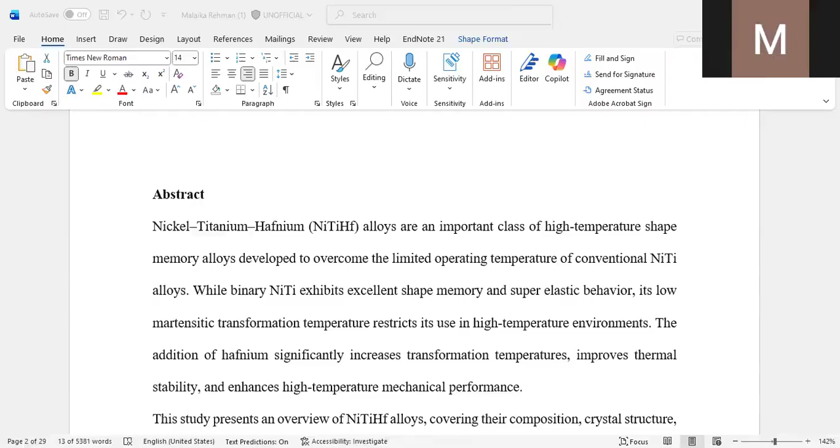Today my topic of presentation is nickel titanium hafnium, which is represented as NiTiHf.

First is its abstract. In its abstract, it tells us that nickel titanium hafnium is a shape memory alloy which works in advanced smart materials, works at high temperature, and is used in aerospace, automotive, medical, and energy systems, and many more.

Its keywords are nickel titanium hafnium alloy, high temperature shape memory alloy, Martensitic transformation, crystal structure, smart materials, and artificial intelligence.

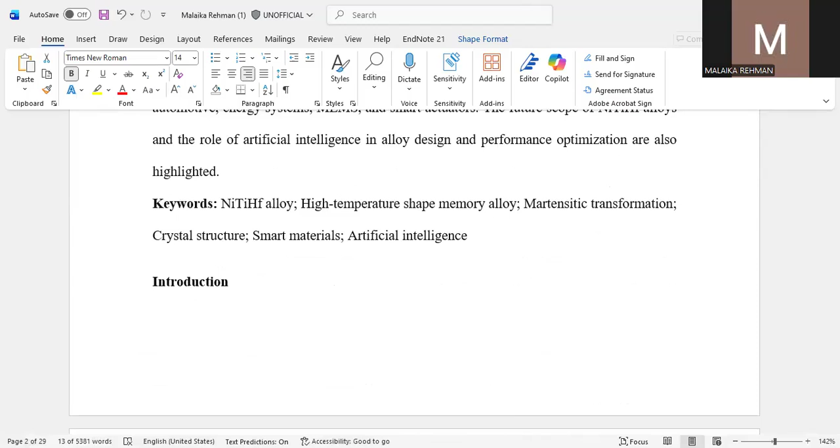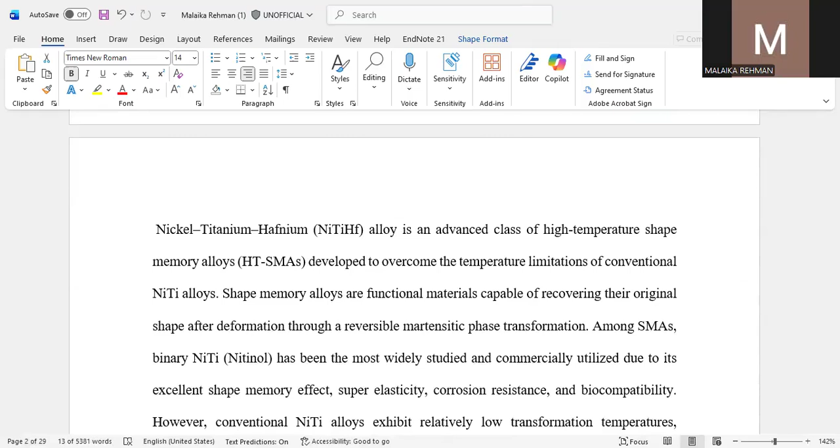In its introduction, it tells us about what is a shape memory alloy. These are materials that can remember their original shape, formed at high temperature, recover shape when heated, and based on phase transformation used in actuators and smart devices.

It tells us that nickel titanium works only when the temperature is below 100 degrees Celsius. Many industries need materials for high temperatures, so nickel titanium was added with hafnium, and a new alloy was made, which is nickel titanium hafnium, NiTiHf, and it can work at temperatures of about 200 to 300 degrees Celsius.

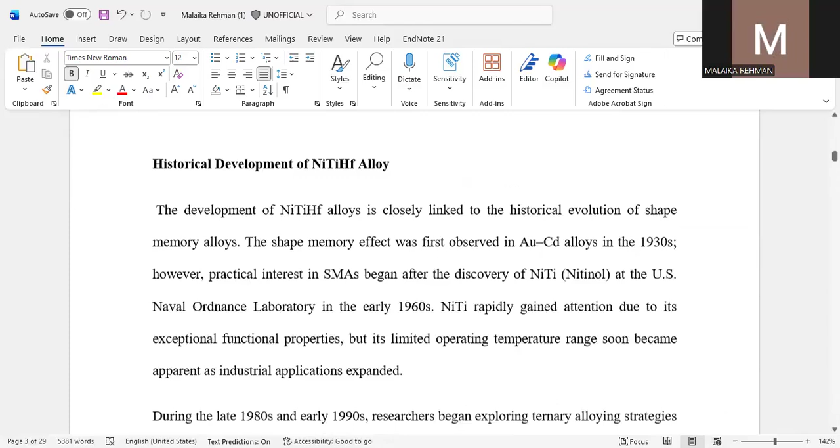Then, history of nickel titanium hafnium alloy. Its development is closely linked to the historical evolution of shape memory alloys. The shape memory effect was first observed in AuCd alloys, gold and cadmium alloys.

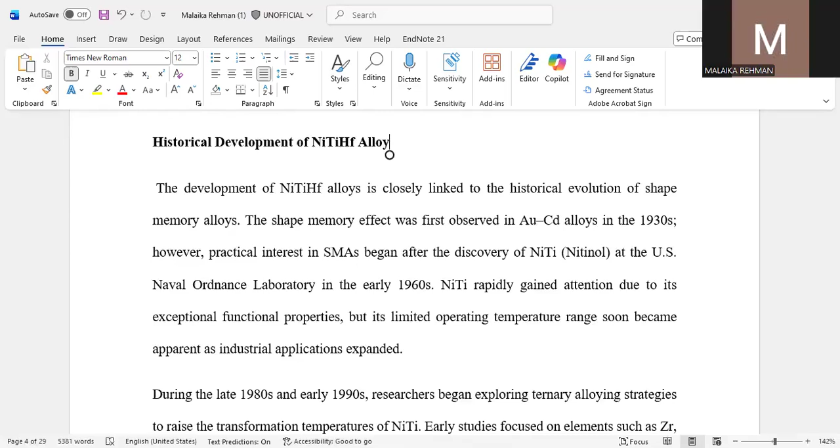In the 1930s, practical interest in SMAs began after the discovery of nickel titanium, Nitinol, at the US Naval Ordnance Laboratory in the 1960s. NiTi rapidly gained attention due to its exceptional functional properties, but its limited operating temperature range soon became apparent as industrial applications expanded.

During the 1980s and early 1990s, researchers began exploring ternary alloying strategies to raise the transformation temperature of nickel titanium, Nitinol. Early studies focused on elements such as Zr, hafnium, palladium, platinum, and gold.

Among these, hafnium emerged as one of the most effective alloying elements due to its strong influence on lattice distortion and phase stability. Initial investigations demonstrated that partial substitution of titanium with hafnium significantly increased the Martensitic transformation temperature without completely suppressing the shape memory effect.

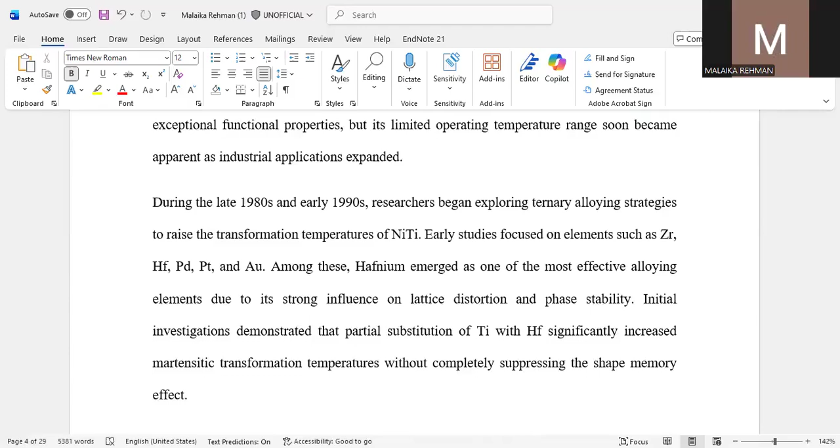Then, in the mid-1990s, systematic experimental studies confirmed that increasing hafnium content, typically about 10 to 30% atomic percentage, could raise the transformation temperature well above 200 degrees Celsius.

This period marked the recognition of nickel titanium hafnium as a distinct class of high temperature shape memory alloys, rather than a simple modification of nickel titanium Nitinol.

Researchers also observed that hafnium addition increased lattice parameters, strengthened atomic bonding, and enhanced resistance to thermal degradation, although it introduced challenges such as increased brittleness and processing difficulties.

From the early 2000s onward, advancements in processing techniques such as vacuum arc melting, powder metallurgy, rapid solidification, and thin film deposition enabled better compositional control and microstructure refinement of nickel titanium hafnium alloys.

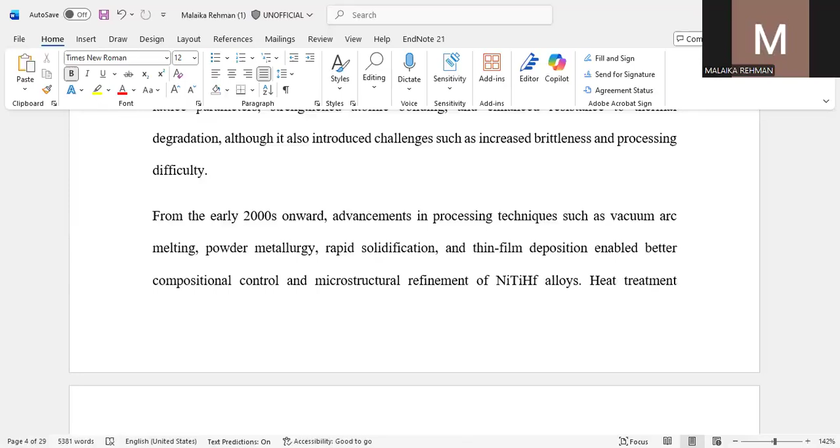Then, heat treatment strategies including solution treatment and aging were developed to optimize precipitate formation and improve functional fatigue life. These developments significantly enhanced the reliability and repeatability of nickel titanium hafnium alloy under cyclic thermal and mechanical loading.

In recent years, research on this alloy has expanded toward thin films, micro electromechanical systems (MEMS), and additive manufacturing, driven by the demand for compact, high temperature actuators and sensors. The alloy has also gained attention for its potential role in aerospace morphing structures, adaptive engine components, and smart energy systems.

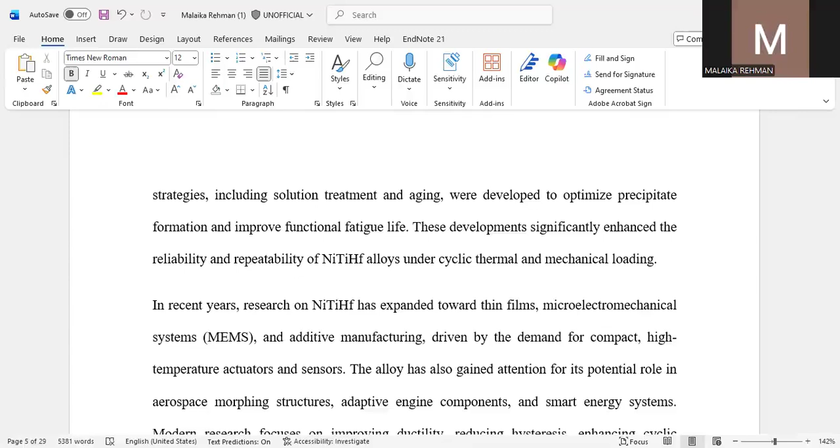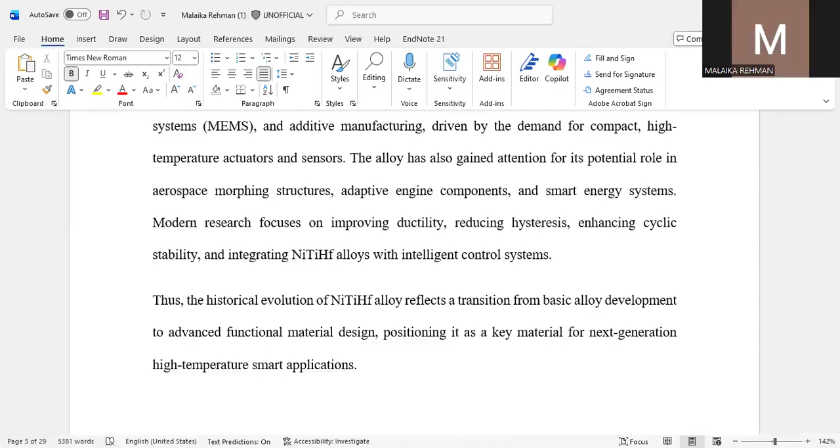Modern research focuses on improving ductility, reducing hysteresis, enhancing cyclic stability, and integrating nickel titanium hafnium alloys with intelligent control systems. The historical evolution of nickel titanium hafnium alloy reflects a transition from basic alloy development to advanced functional material design, positioning it as a key material for next generation high temperature smart applications.

Then, its composition and chemical formula. Nickel titanium hafnium is basically a mixture of three elements, which are nickel, titanium, and hafnium.

Its chemical composition has hafnium content about 5 to 30%, and nickel nearly about 50% for phase stability, which controls the compositional properties. Its general formula is Ni50, Ti(50-X), Hf(X), atomic percentage.

Then, elemental composition and role of each element. First, the role of nickel: it stabilizes the

Then the role of titanium, the basic element of the shape memory effect. It is the base of the shape memory effect, enables the martensitic transformation, provides corrosion resistance, and works with nickel to form the B2 structure.

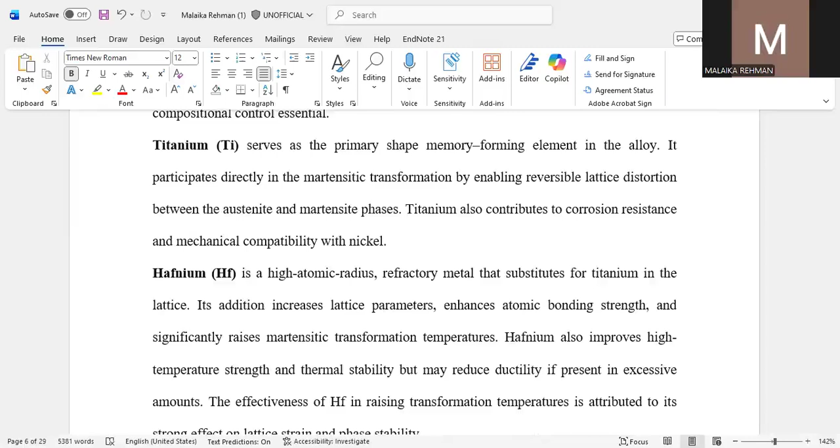Then hafnium, which is the third atom. Its role is that it replaces the titanium atom. It has a large atomic radius, enhances the atomic bonding strength, significantly raises the transformation temperature, and improves the thermal stability of the lattice.

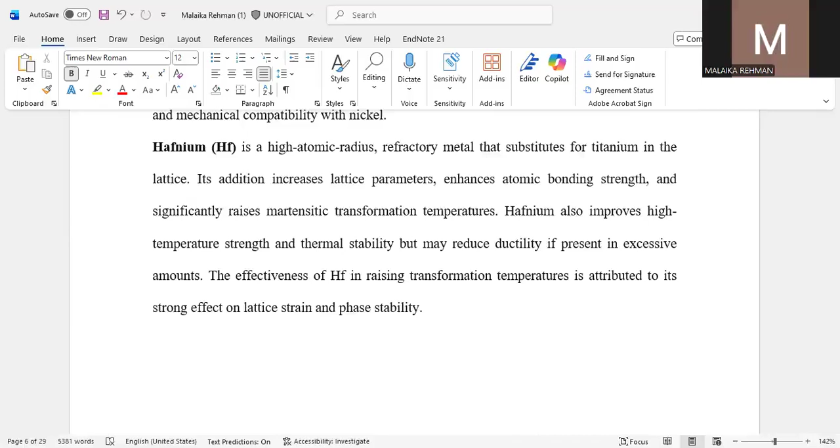Then its atomic weight and weight percentage composition. Nickel-titanium alloys are generally designed and reported in atomic percentage due to the nature of phase transformation and crystallographic considerations. However, because hafnium has a much higher atomic weight than titanium, its addition significantly increases the weight percentage.

For example, we took an alloy with a composition of nickel 50, titanium 35, and hafnium about 15, which corresponds to a much higher hafnium content in weight percentage, often exceeding 40% weight. This affects the density, melting behavior, and processing requirements, making vacuum-based melting techniques essential for the alloy fabrication.

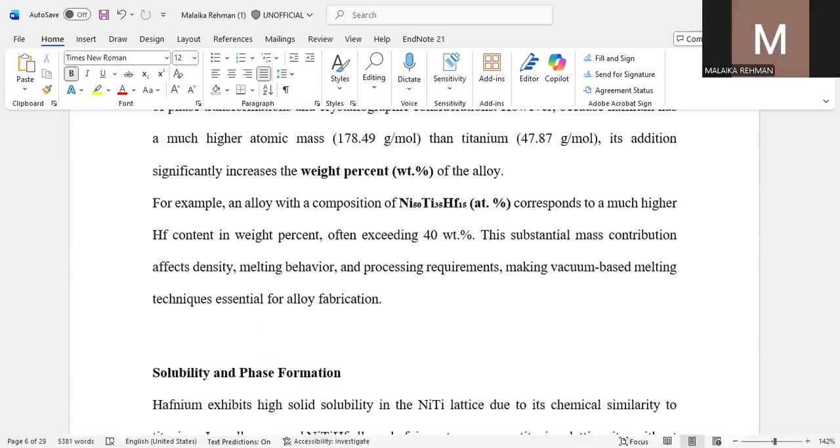Then the next heading is solubility and phase formation, in which hafnium exhibits high solid solubility in the lattice due to its chemical similarity to titanium.

In well-processed nickel-titanium-hafnium alloys, hafnium atoms occupy titanium lattice sites without disrupting the fundamental B2 crystal lattice. At high hafnium concentration or under improper heat treatment conditions, secondary phases such as hafnium-rich intermetallics may form, which can adversely affect the shape memory performance.

To avoid unwanted phase formation, strict control of composition, homogenization, heat treatment, and cooling rates are required. Optimized compositions ensure a single-phase B2 austenitic structure at high temperature and a fully reversible martensitic transformation upon cooling.

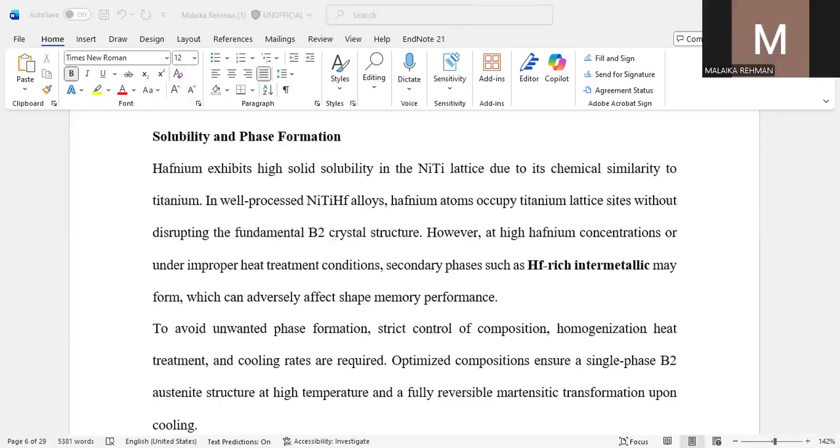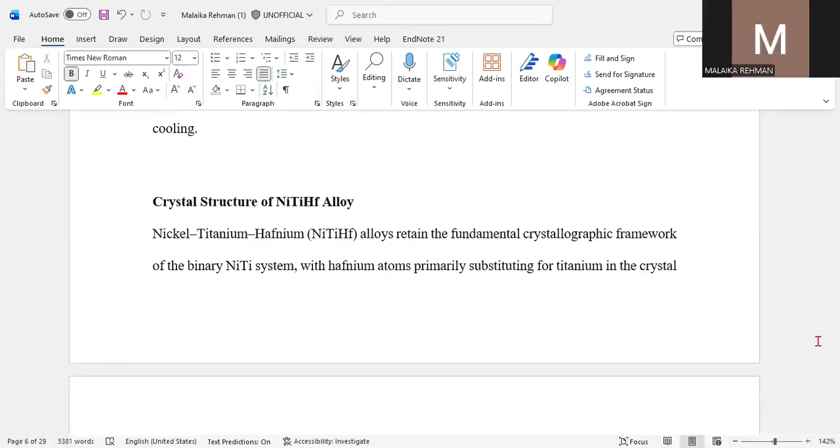Then, the crystal lattice of nickel-titanium-hafnium alloys: hafnium atoms are larger than titanium atoms, so the lattice structure expands, which increases the internal stress, and the martensite becomes more stable, so the transformation occurs at higher temperature.

The substitution of hafnium for titanium expands the lattice, introducing internal strain and enhancing the stability of the martensite phase.

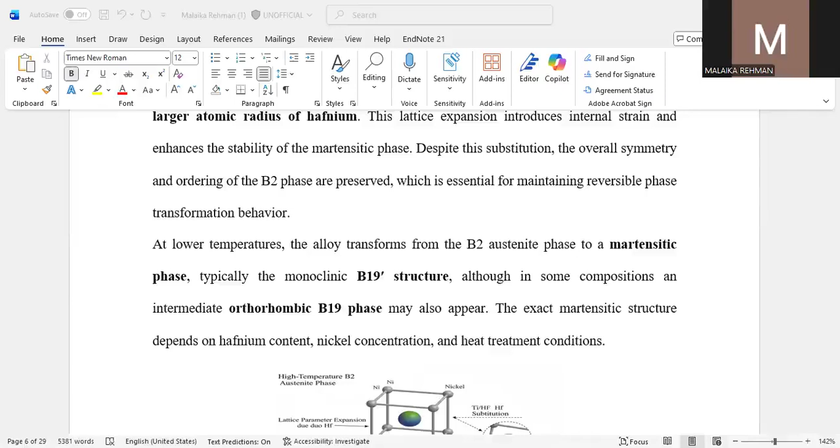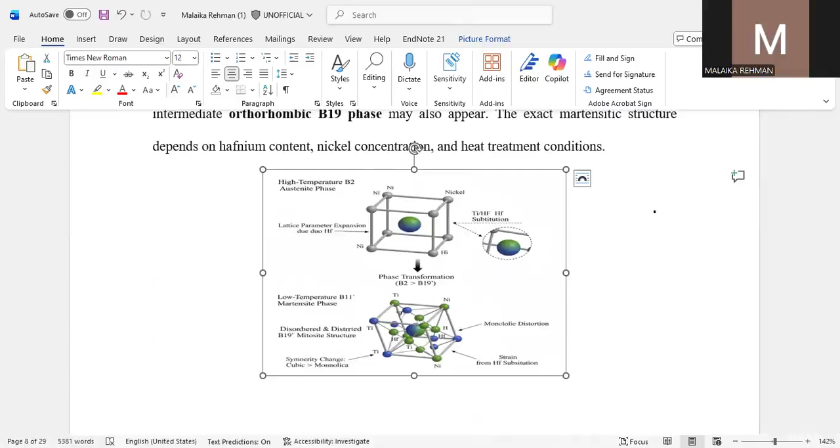At low temperatures, the alloy transforms from the B2 phase to the B19′ structure, although in some compositions an intermediate orthorhombic B19 phase may also appear. The exact structure depends on the hafnium content, nickel concentration, and heat treatment conditions. Here is the diagram of B2 formation to B19 formation, phase transformation, and the orthorhombic structure of the B19 phase.

Then next is martensite phase characteristics. It is a low temperature phase in which the B19′ monoclinic structure forms, creating crystal distortion.

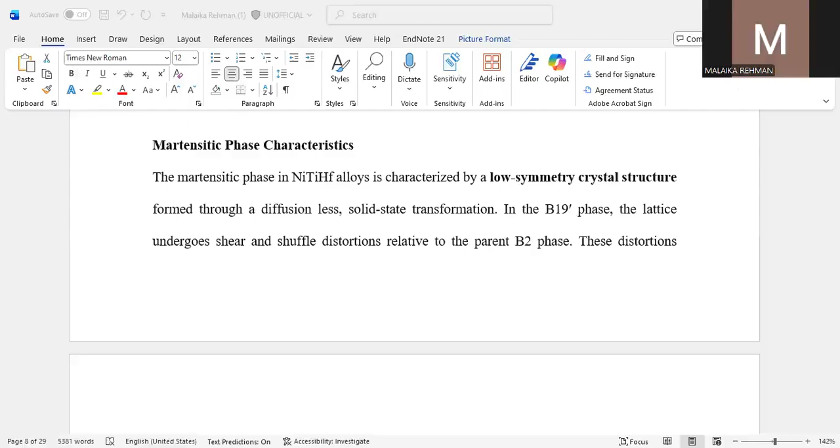In the B19′ phase, the lattice undergoes shear and shuffle distortion relative to the parent B2 phase. These distortions produce multiple variants which accommodate deformation through twinning rather than slip. The presence of hafnium increases the lattice distortion, resulting in enhanced phase stability at increased temperature.

This increase in distortion is one of the primary reasons for the higher transformation temperature observed in nickel-titanium-hafnium alloys compared to conventional Nitinol. Then next is the phase transformation mechanism.

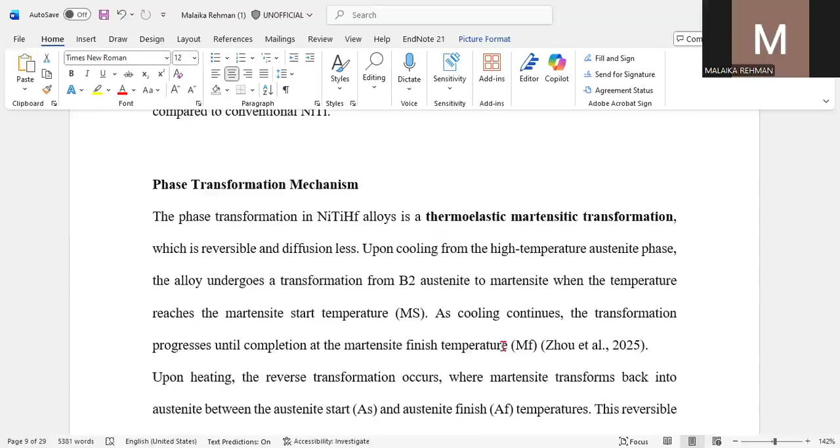This alloy undergoes a thermoelastic transformation which is reversible and diffusion-less. Upon cooling from high temperature, the alloy transforms from austenite to martensite when the temperature reaches the martensite start temperature. As cooling continues, the transformation progresses until completion at the final temperature, represented as Mf.

Upon heating, the reverse transformation occurs, and the martensite lattice transforms back into austenite between the austenite start and austenite finish temperatures. This reversible transformation is responsible for the shape memory effect, and the deformation is recovered during heating as the alloy returns to the austenite phase.

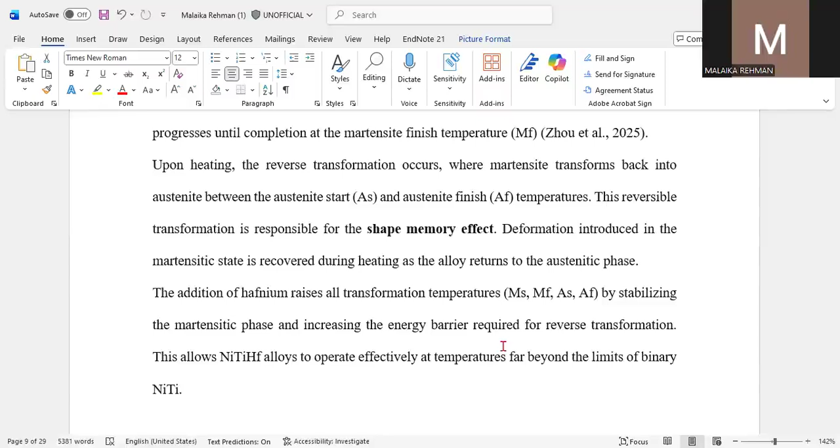The addition of hafnium raises all the transformation temperatures, including Mf.

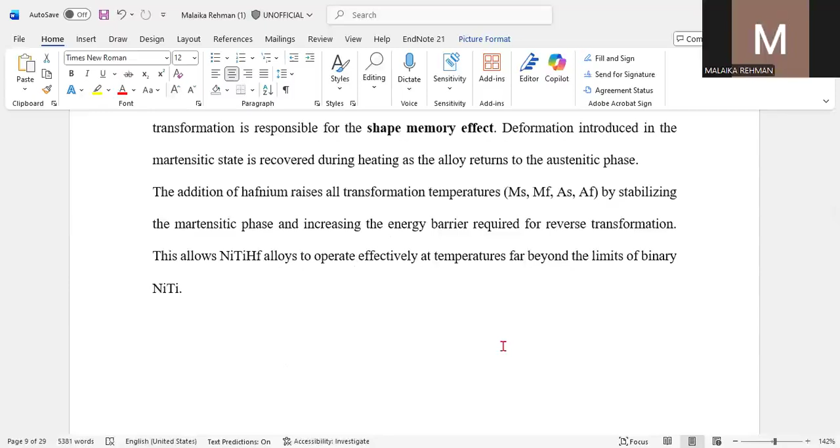Ms, the start temperature of martensite, or final temperature, austenite start temperature, and austenite final temperature, by stabilizing the phases and increasing the energy barrier required for reverse transformation.

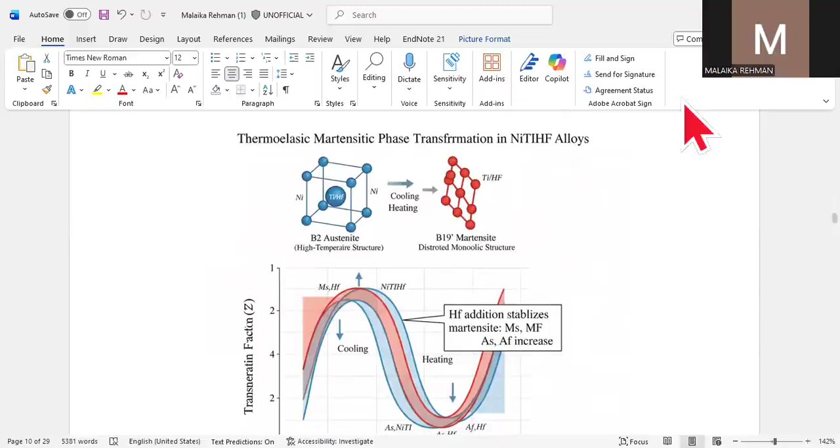Next is the diagram of the thermoelastic martensite phase transformation in the nickel titanium hafnium alloys. It shows how, as the temperature decreases during cooling,

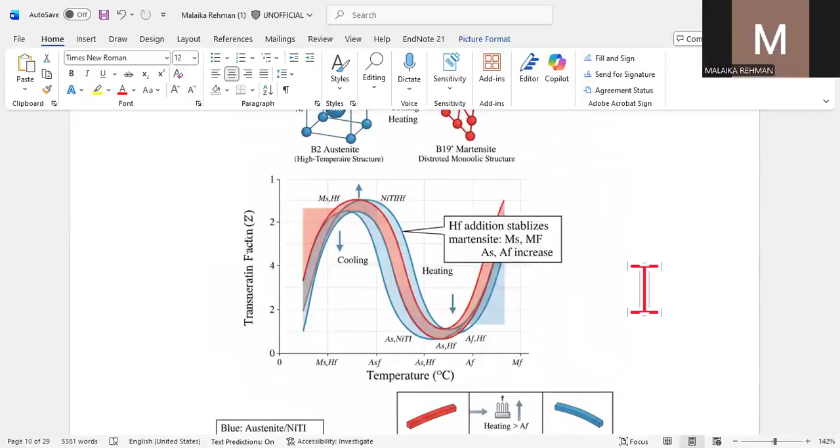next is transformation hysteresis, which is the difference between the heating and cooling processes. It tells us that the nickel titanium hafnium hysteresis is larger than nickel titanium nitinol due to the strong bonding, which increases stability and also slightly reduces the efficiency.

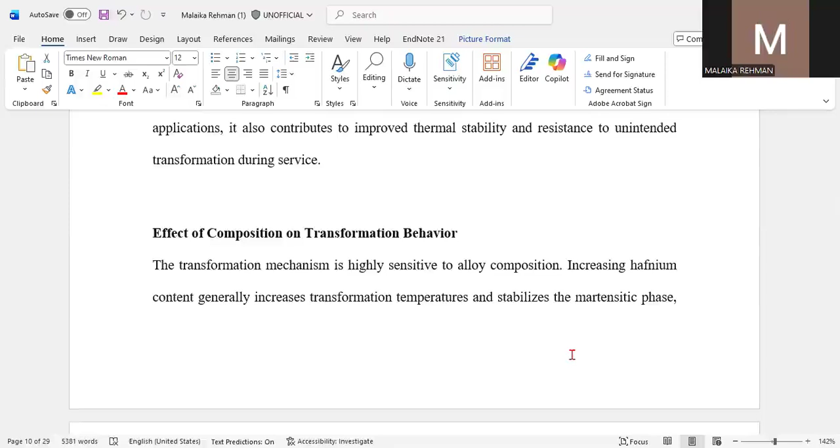Next is effect of composition on transformation behavior. The transformation mechanism is highly sensitive to alloy composition. Increasing hafnium content generally increases transformation temperature and stabilizes the martensite phase, but excessive hafnium may suppress reversibility or promote secondary phase formation.

Similarly, slight deviation in the nickel content can significantly alter the transformation temperature and phase stability, in the process of B2 to B19′ transformation. Optimized composition and heat treatments are therefore essential to achieve a fully reversible B2 to B19′ transformation with stable functional performance.

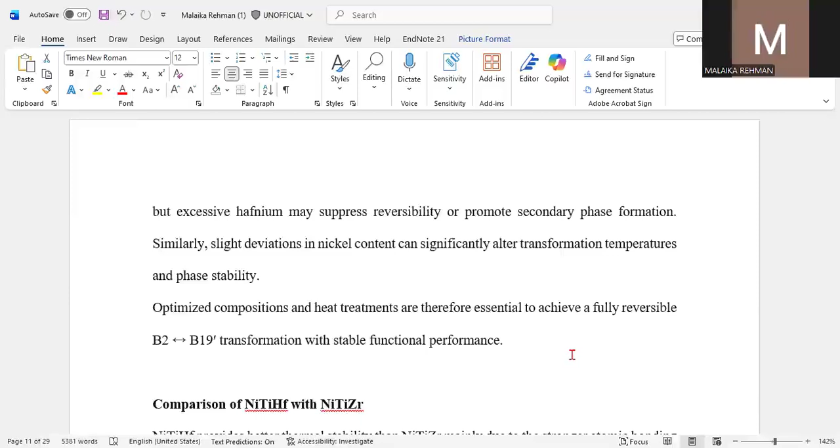Next is comparison of nickel titanium hafnium with nickel titanium zirconium. It shows that nickel titanium hafnium has better stability than nickel titanium zirconium. It causes more lattice distortion, and this leads to higher transformation temperature, creating better cyclic performance. It is more reliable at high temperature, and as a result, its functional properties are retained.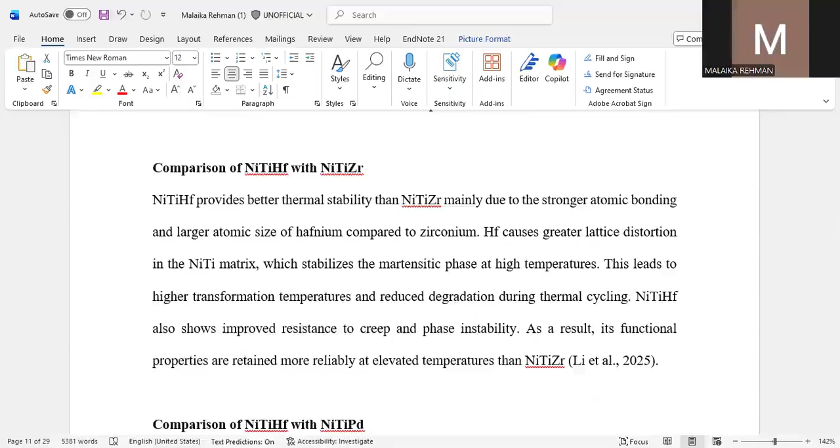Next is comparison of nickel titanium hafnium with nickel titanium palladium, NiTiPd. Nickel titanium palladium has a very high cost. Palladium significantly raises the transformation temperature of NiTi. Palladium has a high density, whereas hafnium is lighter than palladium, so nickel titanium hafnium offers a better strength to weight ratio.

In addition, palladium is a precious metal, which is very expensive compared to nickel titanium hafnium. Nickel titanium hafnium is cost-effective and affordable, therefore providing a cost-effective and lightweight alternative for high-temperature shape memory alloy applications.

Next is fabrication methods of nickel titanium hafnium alloys. The fabrication of nickel titanium hafnium alloy is more challenging than conventional alloys due to high melting point, large atomic mass, and strong reactivity of hafnium.

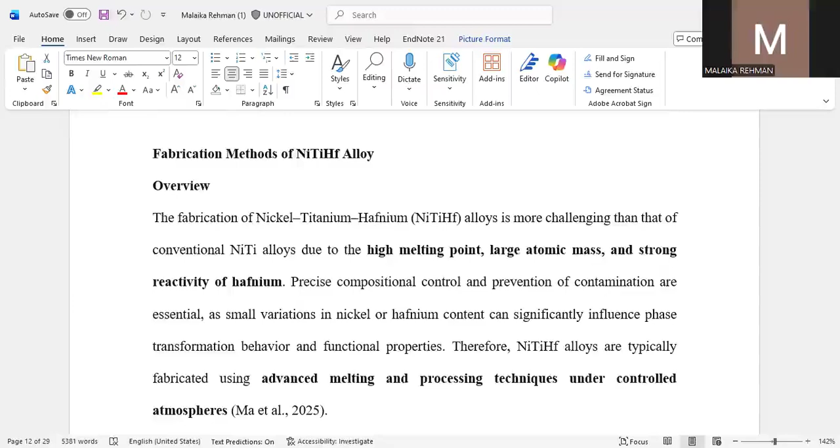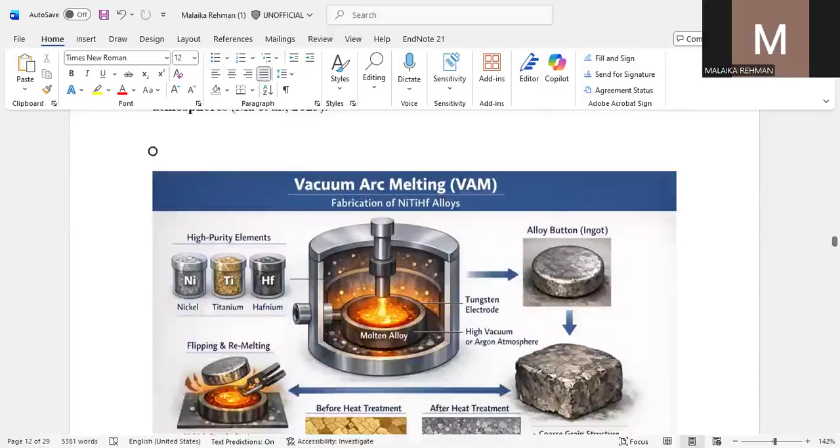Next is the diagram of vacuum arc melting. In this process, vacuum arc melting is basically melting under vacuum or argon, which prevents oxidation. Multiple remelting for uniformity occurs, and it is a common laboratory method.

Next step is induction melting. In this process, we use electromagnetic heating for uniform temperature, creating good mixing of metals at the melting point, and it is suitable for large ingots.

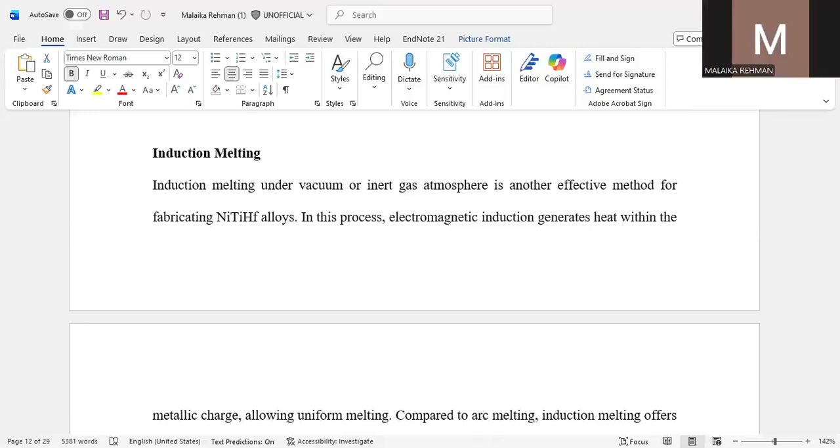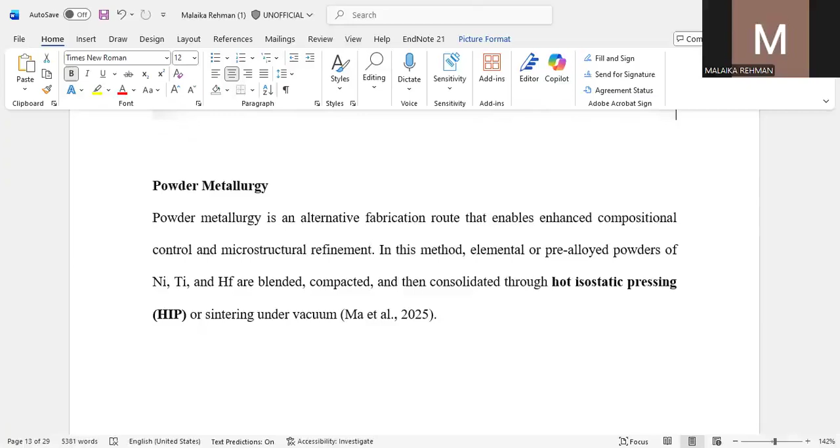Then the next step is powder metallurgy. In this process, we use the metals in powdered form, which is in a fine grain structure. It reduces segregation and is suitable for complex shapes.

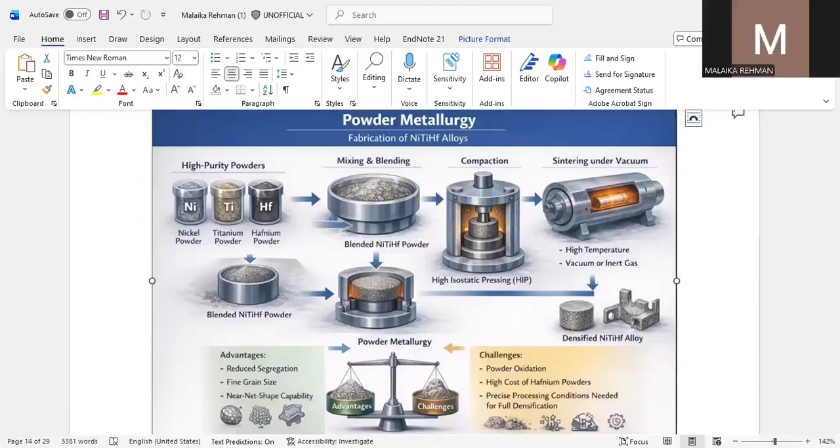Its advantages are reduced segregation, fine grain size, and near net shape capability. Its challenges are powder oxidation and high cost of hafnium.

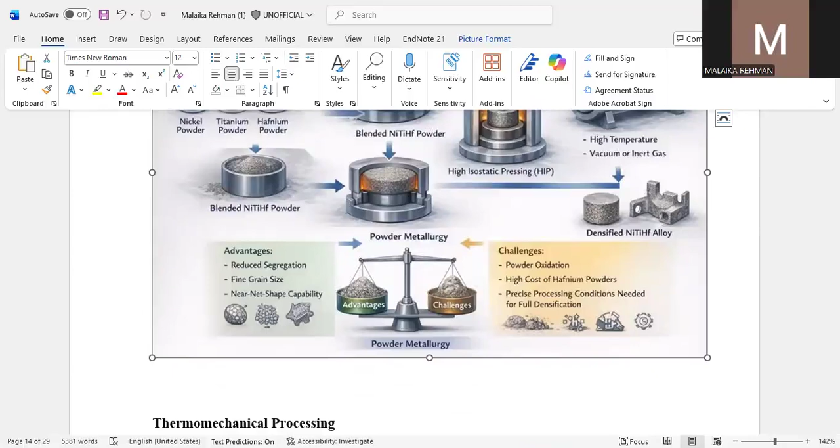Next is thermomechanical processing. In this, solution treatment removes secondary phases, and aging improves the strength and improves transformation stability, essential for good performance.

Then aging treatment is employed to promote the formation of fine precipitates that enhance high temperature strength and cyclic stability.

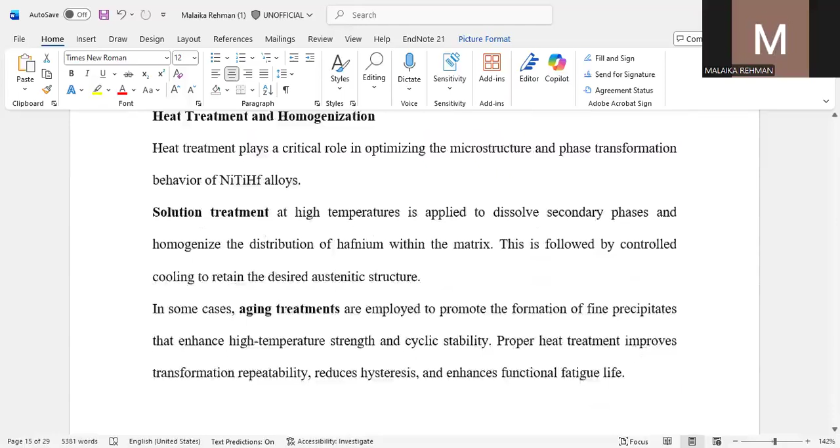Then the next step is thin film and advanced fabrication techniques. Thin film techniques are used such as magnetron sputtering and pulsed laser deposition. These methods allow precise control of composition and thickness.

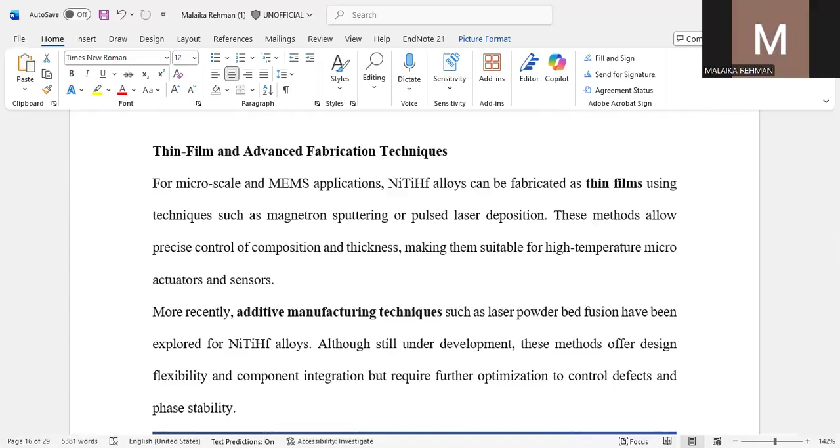And the second one is additive manufacturing techniques such as laser powder bed fusion, which have been explored for nickel titanium hafnium alloys, although still under development process.

It's a process how the solution treatment goes to the aging treatment and then.

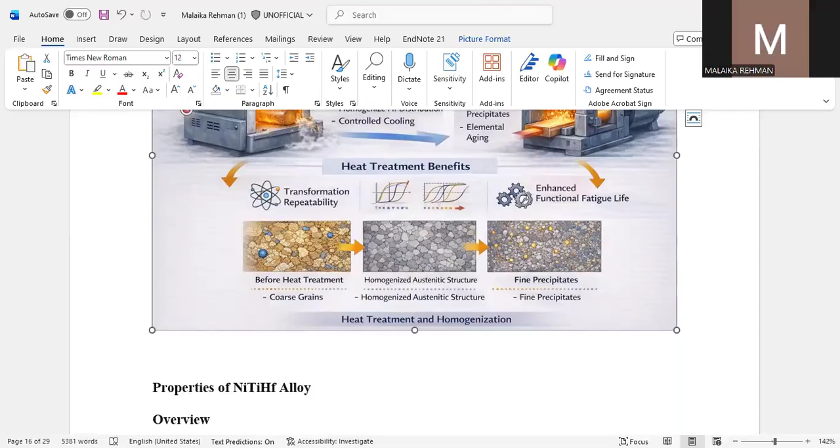Then fine precipitates. Then the next step is its properties.

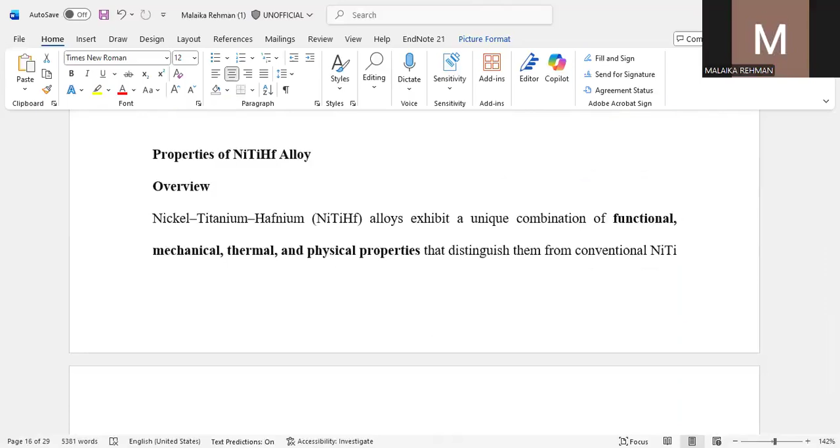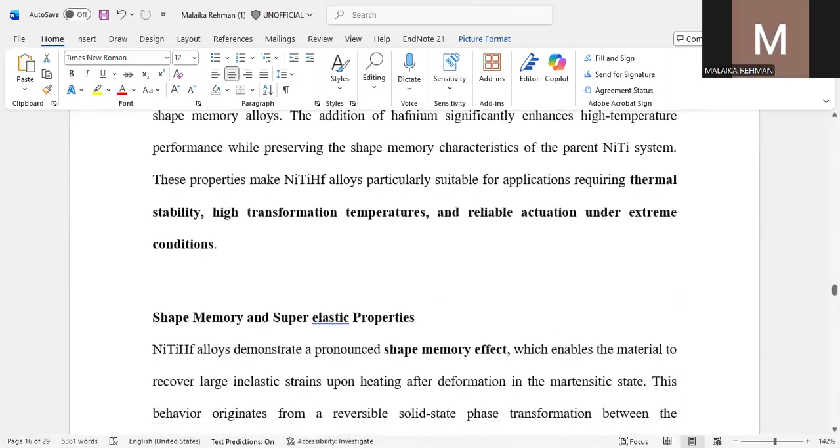In overview, nickel titanium hafnium alloys exhibit a unique combination of functional, mechanical, thermal, and physical properties, and these properties make the nickel titanium hafnium alloy particularly suitable for applications which require thermal stability, high transformation temperature, and reliable actuation under extreme conditions. Such properties include shape memory and superelastic properties.

It announces the shape memory effect, which enables the material to recover large inelastic strain upon heating after deformation in the martensitic state. This behavior originates from a reversible solid phase transformation between the low temperature martensite and the high temperature austenite phase.

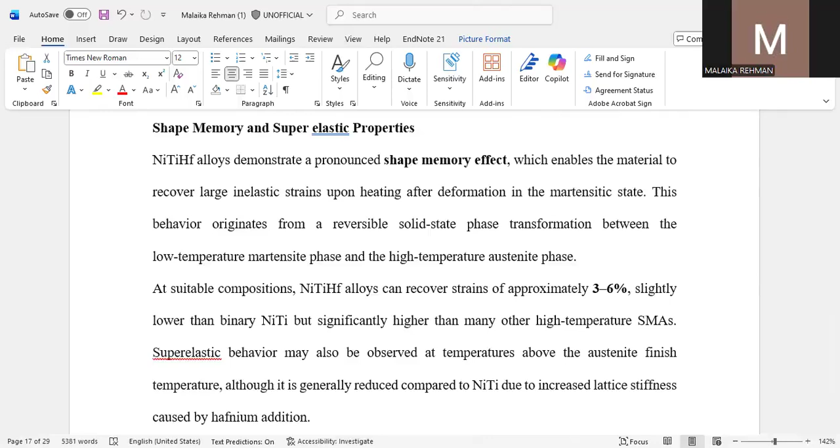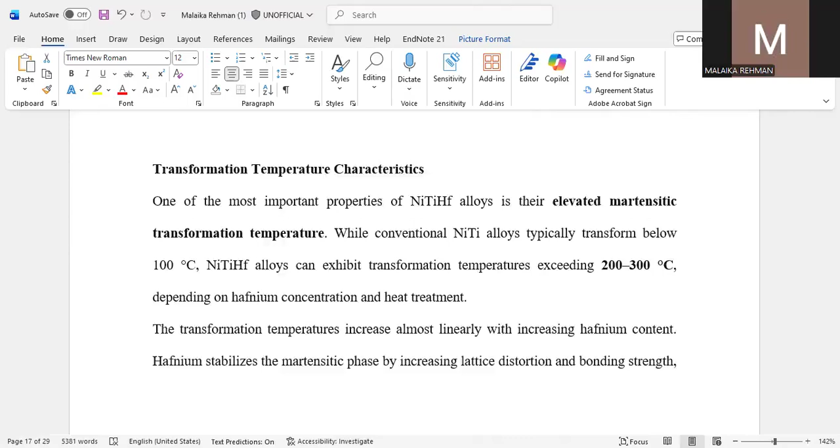The transformation temperature characteristic is one of the most important properties of the alloy, which elevates the martensitic transformation temperature. While conventional nitinol alloys typically transform below 100 degrees Celsius, nickel titanium hafnium alloys can exhibit transformation temperatures exceeding 200 to 300 degrees Celsius, depending upon the concentration of hafnium used in the material and the heat treatment. The transformation temperature increases almost linearly with increasing hafnium content. Hafnium stabilizes the structure, and it is ideal for high temperature actuators and thermal sensing applications.

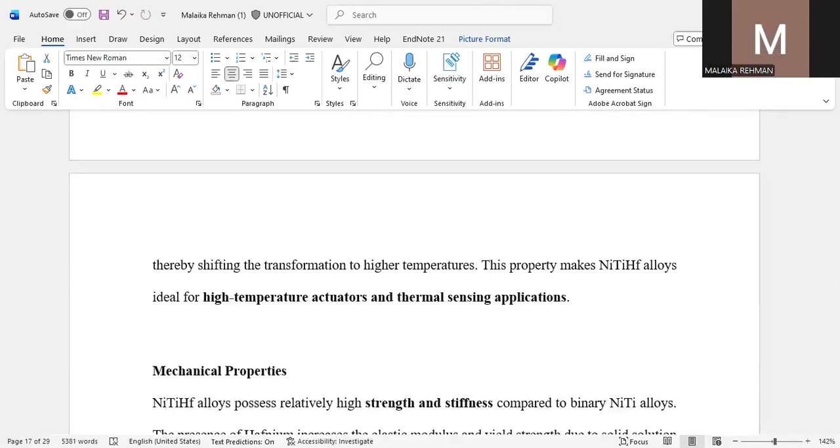Then its mechanical properties. This tells us about the high strength, high elastic modulus, and also the creep resistance, which is better. It reduces the ductility when the content of hafnium increases.

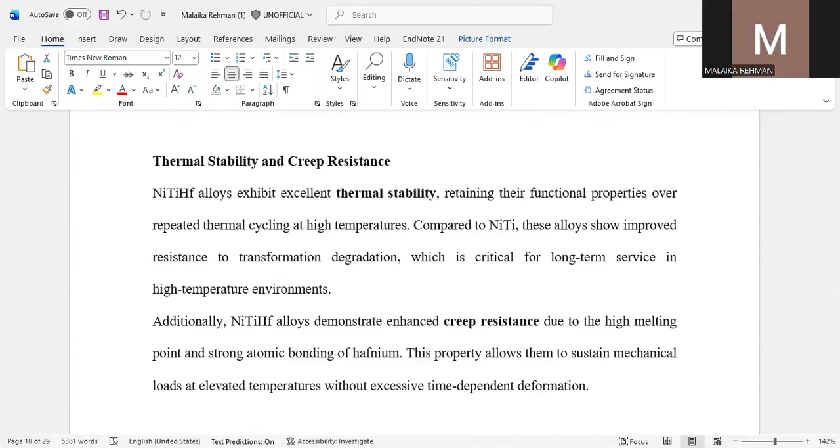Then the second property is thermal stability and creep resistance. This works in the 200 to 300 degrees Celsius range, as we read on the previous slide. It stabilizes thermal cycling, so less degradation of nitinol occurs, making it suitable for long-term use. Then, creep resistance: nickel titanium hafnium alloy enhances creep resistance due to the high melting point and strong atomic bonding of hafnium.

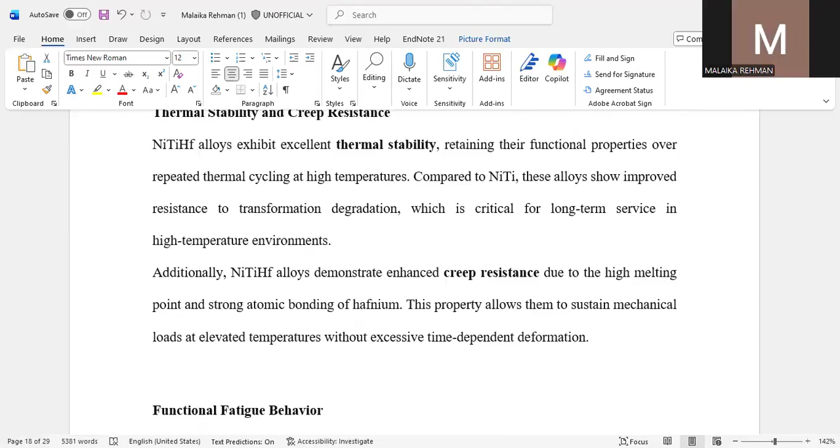Then the second one is functional fatigue behavior. It refers to the degradation of shape memory performance under repeated thermal and mechanical cycling. It allows improved high temperature functional fatigue resistance compared to nitinol alloys operating beyond their safe temperature range. The functional fatigue life of nickel titanium hafnium alloy is influenced by factors such as composition, microstructure, precipitate formation, and applied stress.

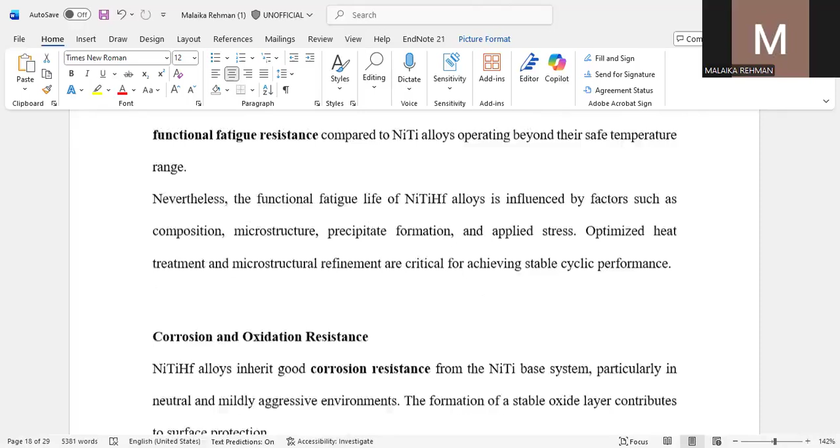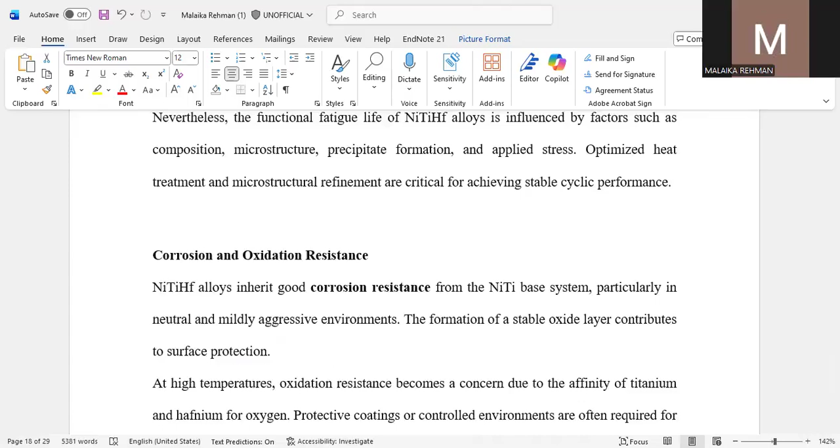Then corrosion and oxidation. Nickel titanium hafnium alloys exhibit good corrosion resistance, particularly in neutral and mildly aggressive environments. At high temperature, oxidation becomes a concern due to the affinity of titanium and hafnium for oxygen. It needs coating for protection, and this is important in aerospace use.

Next are the physical properties of nickel titanium hafnium. This compares nickel titanium hafnium with nitinol; due to the high atomic mass of hafnium, the alloy exhibits a higher thermal expansion coefficient, and it increases electrical resistivity. These physical property changes must be considered in component design for aerospace and precision actuator applications.

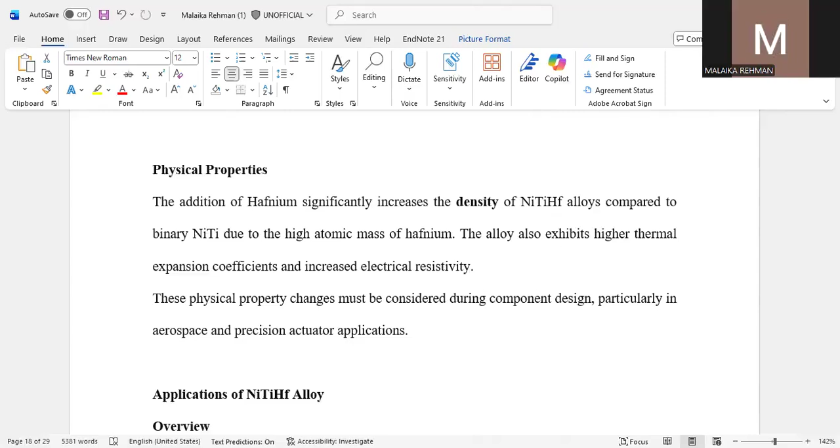Next is the application of nickel titanium hafnium alloy, the first of which is aerospace application. In this application, high temperature actuators are used for morphing wings, and it is used in engine components, and it controls vibrations.

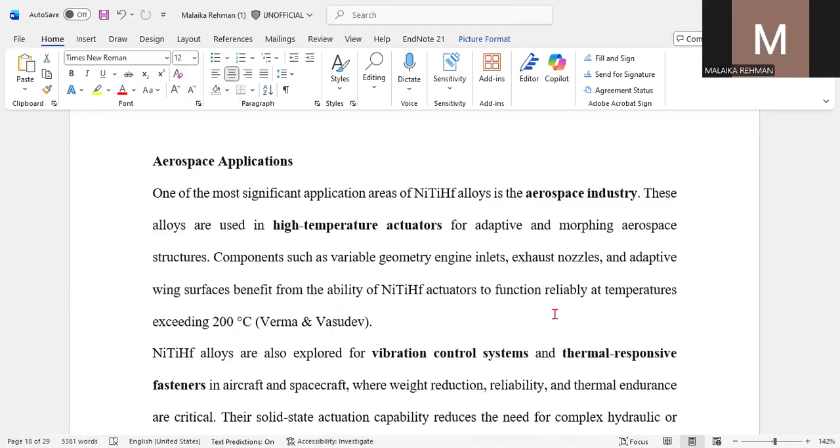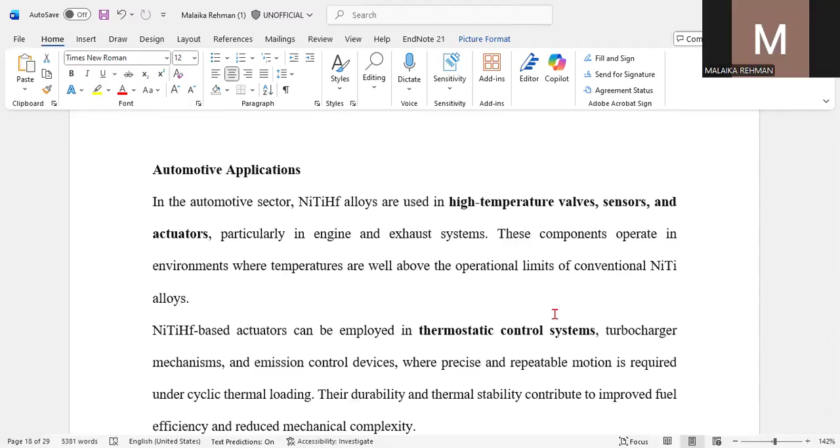The second is automotive application. Here, high temperature valves, sensors, and actuators are used, which are essential for thermal switches and turbocharger actuators, and it controls the emission system.

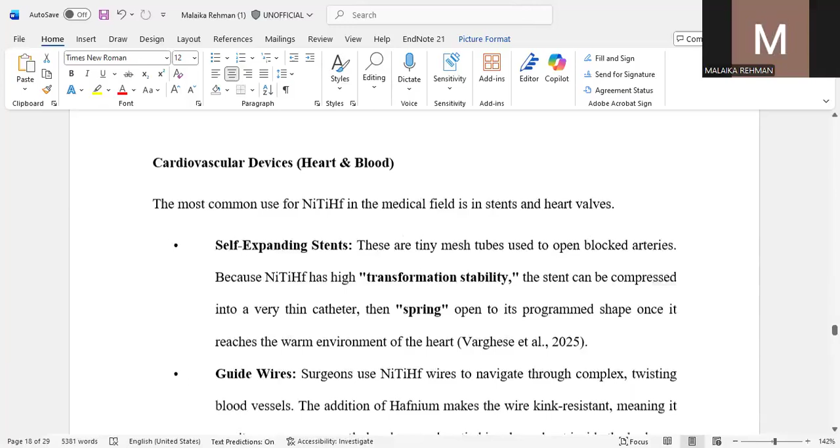Next one is the medical application, in which we studied. First one is cardiovascular devices. In these devices, self-expanding stents are made.

These are tiny mesh tubes used to open blocked arteries, because nickel titanium hafnium has high transformation stability, which is used to open the programmed shape once it reaches the warm environment of the heart.

Then in orthopedics, used in bones and joints, nickel titanium hafnium is used for implants, needed to mimic the flexibility of human bone staples.

Doctors use these to hold fractured bones together, and the staple is inserted in a loose shape. Once it warms up to the body, it naturally tightens, pulling the bone fragments together to speed up the healing.

Next is spinal spacers. These help maintain the gap between the vertebrae. It increases stability, giving the spacer the strength to handle high stress, and it doesn't collapse under the weight of the patient's body.

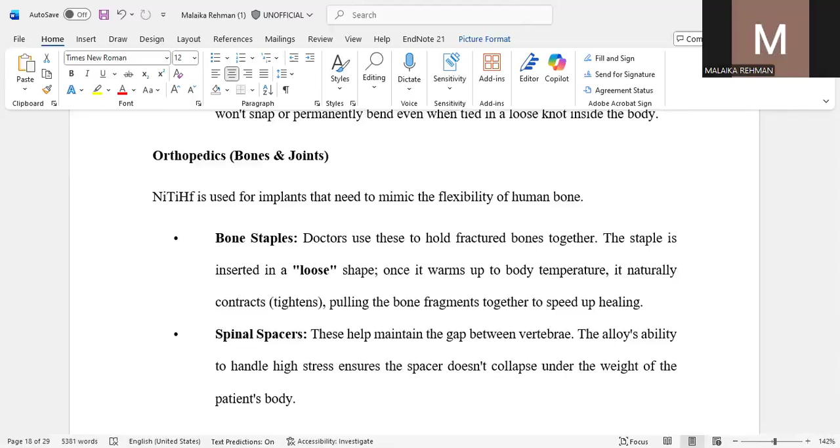Next is energy and power systems. In this, thermal switches are made, smart valves are used, and adaptive flow control devices in power plants and energy harvesting systems are made.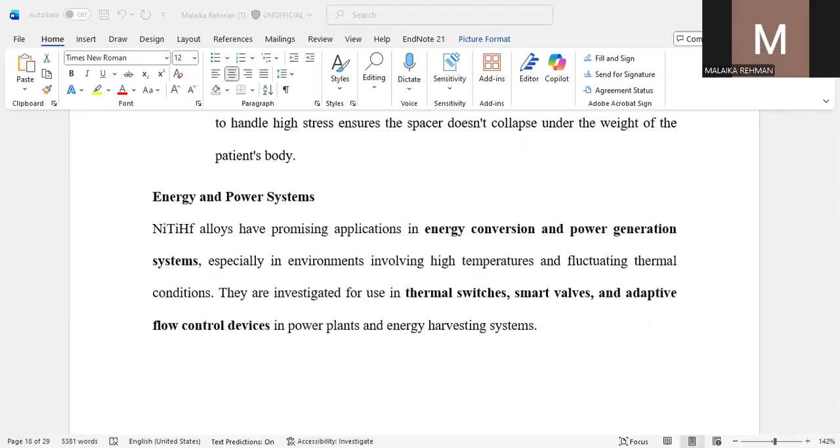The ability of nickel titanium hafnium alloys to convert thermal energy into mechanical motion makes them attractive for waste heat recovery systems.

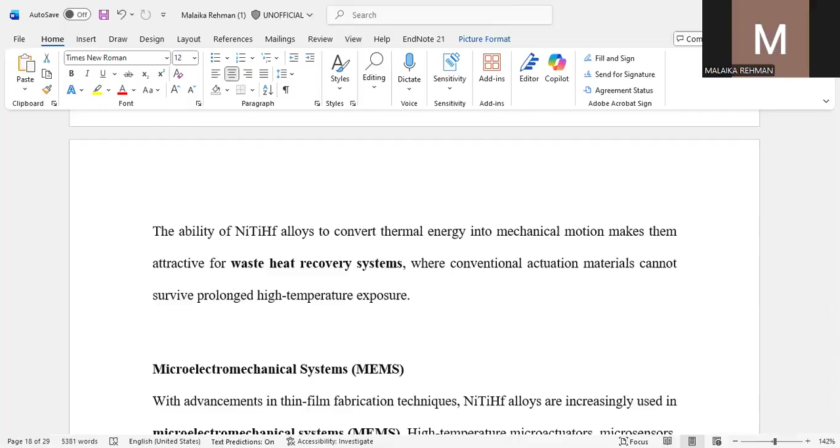Next is microelectromechanical systems, MEMS. With advancement in thin film fabrication techniques, these alloys are increasingly used in microelectromechanical systems. High temperature micro actuators, micro sensors, and micro valves fabricated from nickel titanium hafnium operate in harsh environments.

Compared to traditional microelectromechanical system materials, nickel titanium hafnium alloys provide large actuation strains, compact size, and autonomous thermal response, making them ideal for miniaturized smart systems.

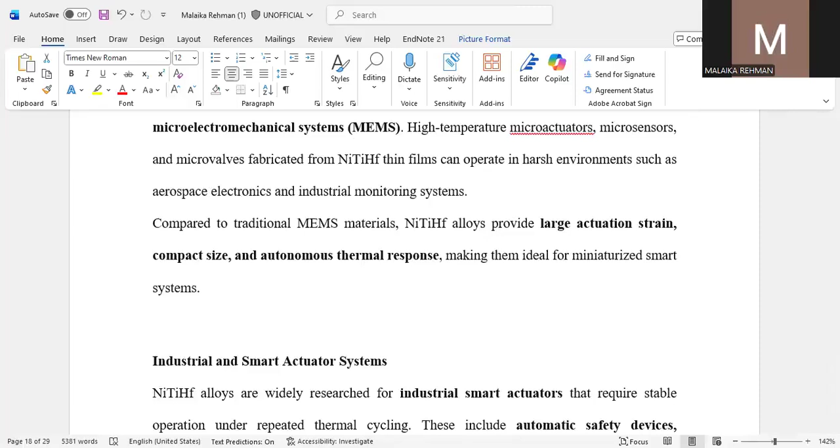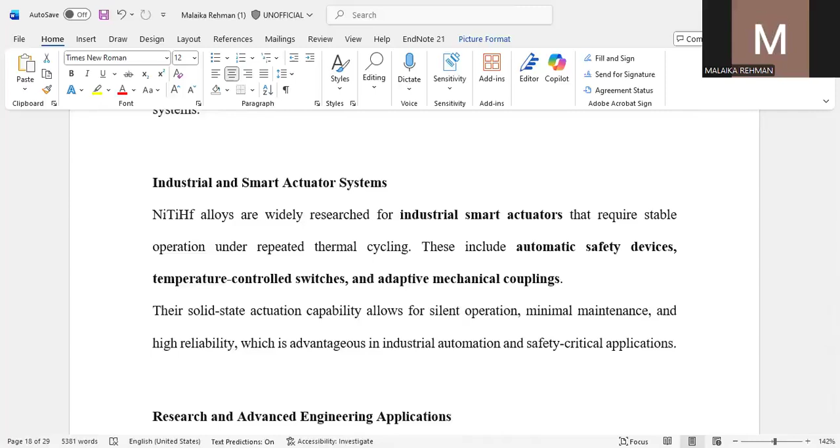Next application is industrial and smart actuator systems. Industrial smart actuators require stable operation under repeated thermal cycling. These include automatic safety devices, temperature-controlled switches, and adaptive mechanical coupling.

Research and advanced engineering applications. In academic and industrial research, these serve as model materials for studying high temperature phase transformation, functional fatigue, and smart material behavior. They also serve as a benchmark material for the development of next generation alloys.

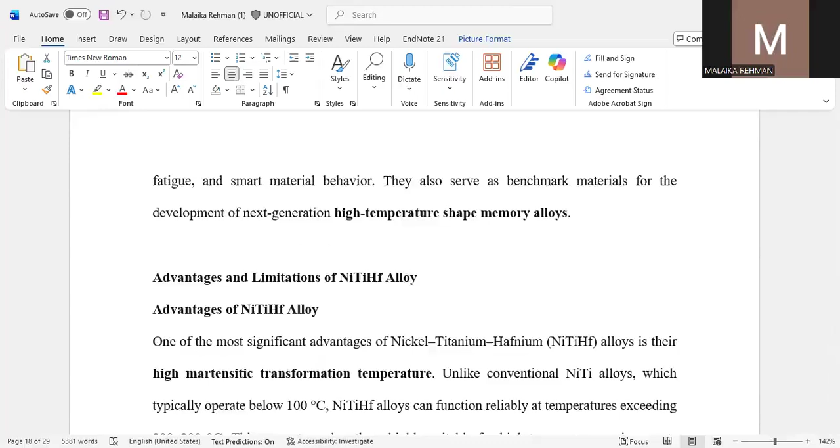Next are the advantages and limitations of nickel titanium hafnium. In the advantages: it attains high transformation temperature, it is excellent for thermal stability, it gives high strength, good creep resistance, and reliable smart behavior.

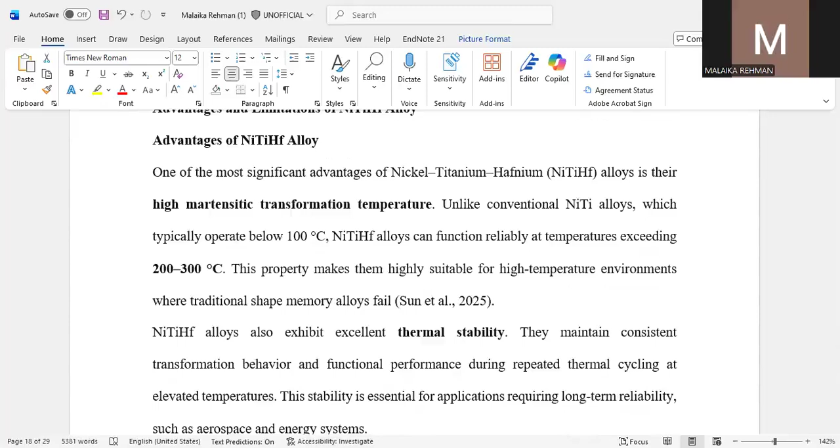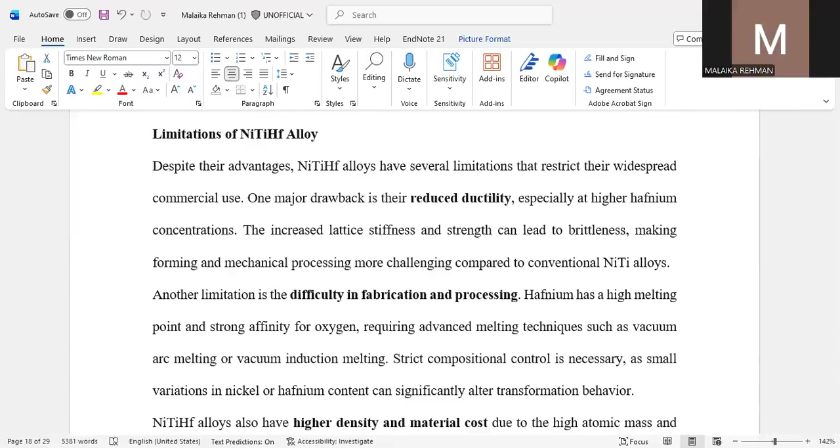Its limitations are: first, it has low ductility, processing and fabrication is difficult, it has high density, it causes oxidation issues, and large hysteresis.

Next is the future scope of nickel titanium hafnium alloys. This includes improving ductility, better fatigue life, creating thin films for MEMS, advancement in additive manufacturing, and also adaptive smart systems.

Then the role of AI in nickel titanium hafnium alloy development. Artificial intelligence plays a transformative role in future development by predicting properties, optimizing composition, reducing experiments, improving manufacturing, and enabling intelligent materials.

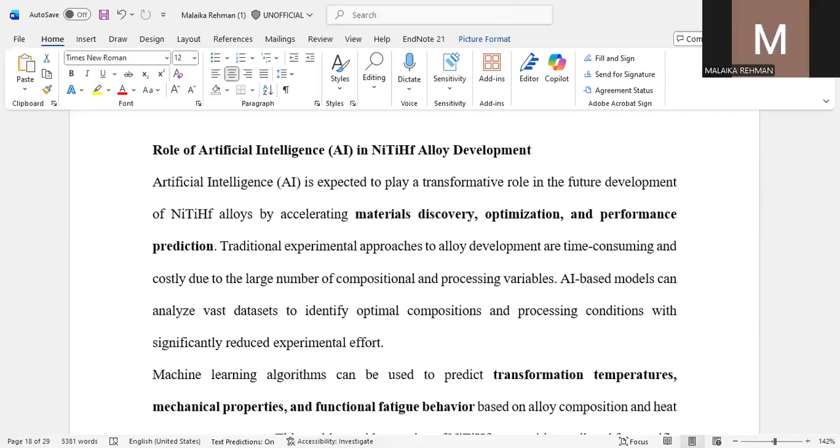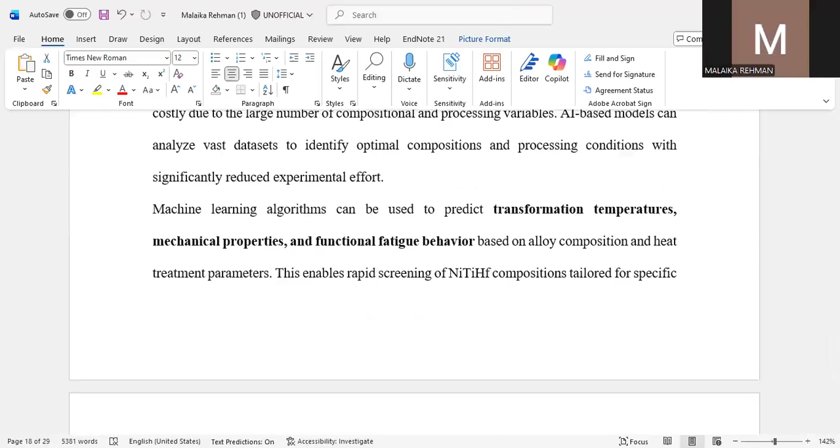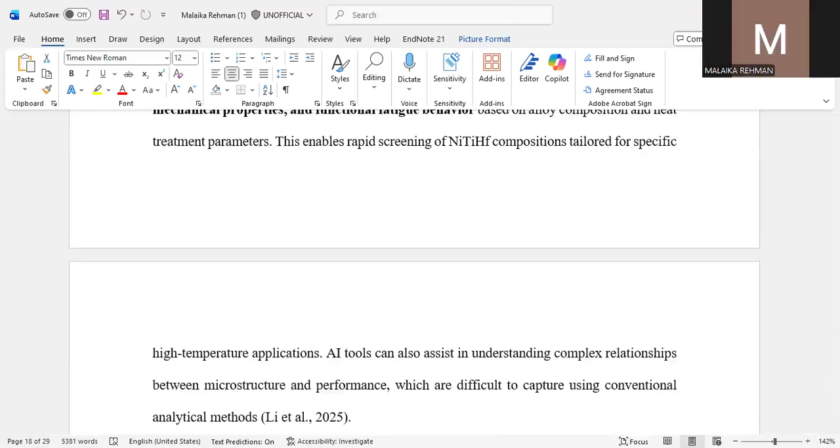Machine learning algorithms can also be used to predict transformation temperatures, mechanical properties, and functional fatigue behavior based on alloy composition and heat treatment parameters. It also enables rapid screening of nickel titanium hafnium compositions specific to high temperature applications.

In manufacturing, AI can support process optimization and quality control, particularly in advanced fabrication techniques such as additive manufacturing and thin film deposition. Real-time data analysis and predictive control systems can help minimize defects, control phase formation, and ensure reproducible shape memory behavior.

Next is smart systems and AI-integrated applications. AI-driven feedback mechanisms can be integrated with nickel titanium hafnium actuators to enable self-adjusting, self-monitoring, and energy-efficient smart structures.

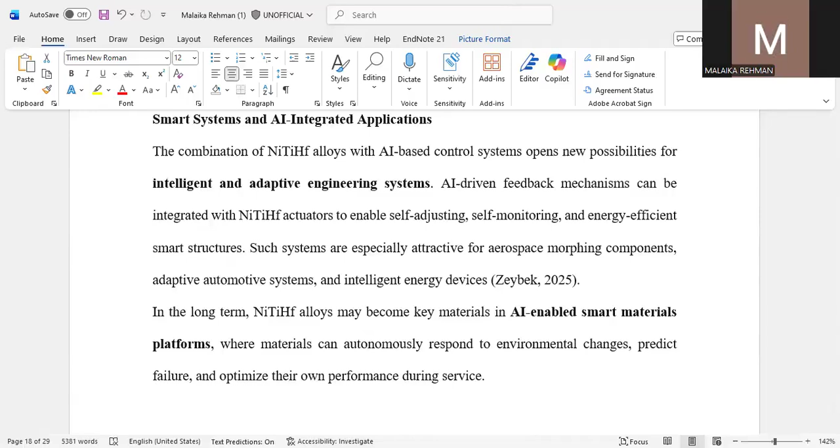In long-term use, nickel titanium hafnium alloy may become a key material in AI-enabled smart materials platforms, where materials can autonomously respond to environmental changes, predict failure, and optimize their own performance during service.

In conclusion, nickel titanium hafnium is an advanced high temperature shape memory alloy. Hafnium improves the temperature stability and makes it suitable for extreme conditions, enhancing thermal stability and improving high temperature mechanical performance. It is helpful despite processing challenges, and it has strong future potential.